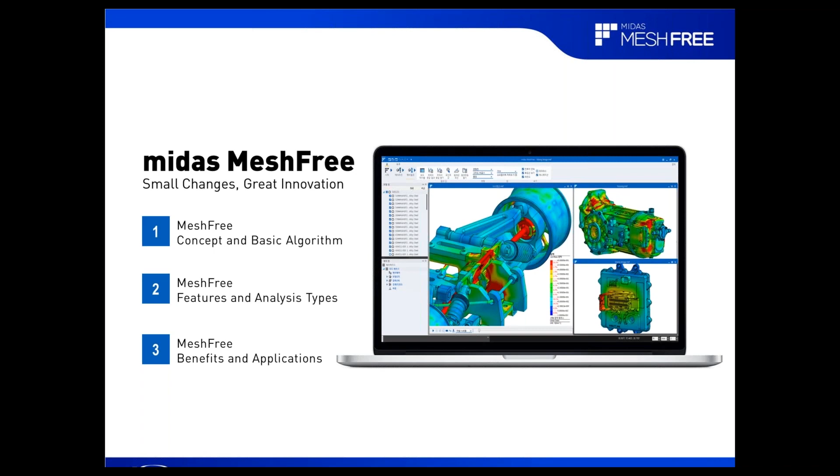But before starting the webinar, let me introduce MIDAS IT, the company behind MIDAS MeshFree. MIDAS IT is a simulation software development and distribution company. With our software, you can simulate the world around you. Our CAE simulation software allows you to simulate the behavior of objects, while our human simulation software can be used in human research and medical services.

MIDAS IT is presented with those three titles in Korea. First of all, since we started as a CAE software development and distribution company in the civil engineering field, we have ranked as the #1 market share holder worldwide. Also, MIDAS IT is known for our special management philosophy, naturalistic humanism. In 2016, we were selected as the best company to work for in one of the major newspapers in Korea.

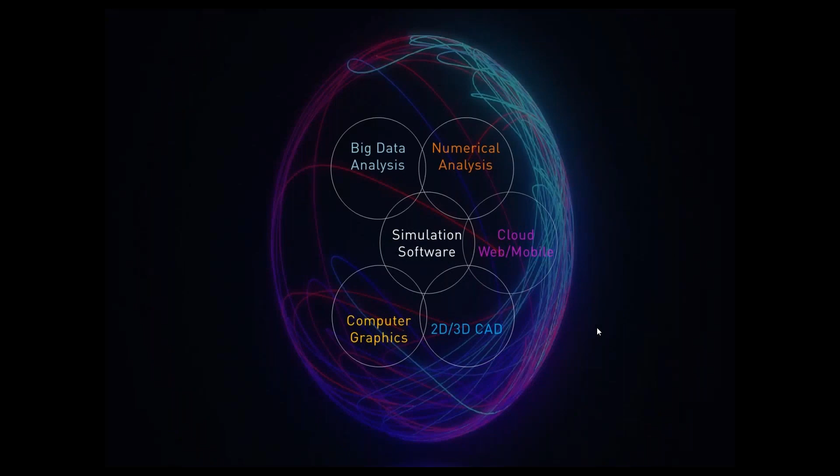MIDAS software simulation technology is aimed to mathematically model the phenomena in nature, solve differential equations through the numerical analysis, display optimal design results with the computer graphics. Recently, we also introduced AI, big data, and web mobile technology into our services.

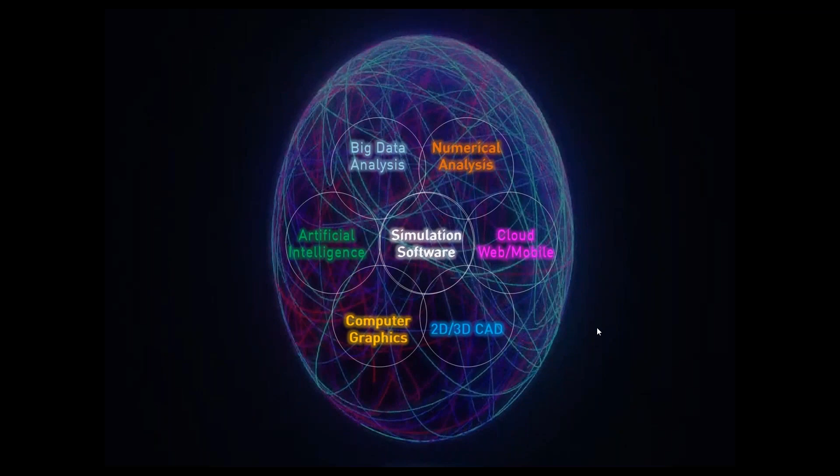In MIDAS, we believe in promoting the world happiness through our simulation technology and software. With our technology, we simulate buildings, bridges, tunnels, and manufacturing machines and objects in both civil and mechanical industries. We also simulate human behavior through our medical, healthcare system and our HR management system.

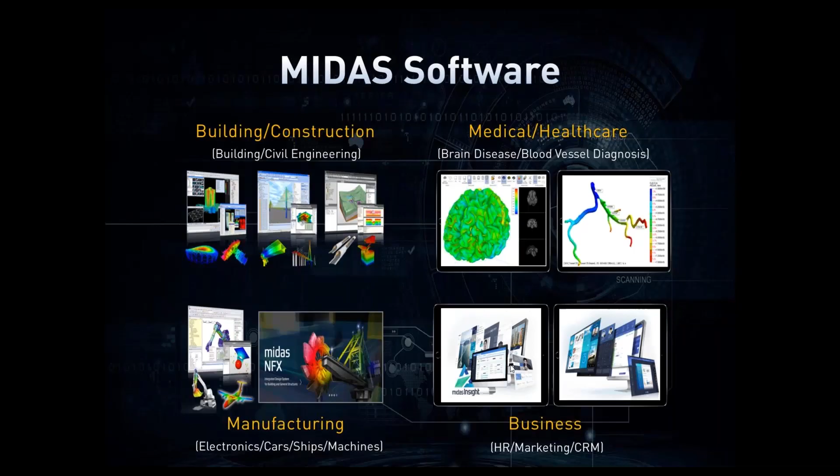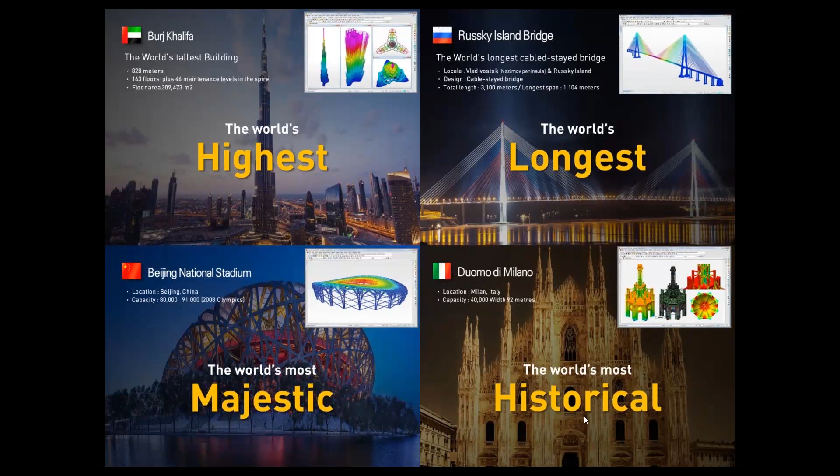You may think engineering and medical or human resource management services to be very different. However, human beings are a part of nature, so it must be possible to study humanity with our simulation technology. As you can see in this slide, the world's highest, longest, majestic historical projects all were analyzed and designed with MIDAS software.

In the civil engineering CAE market, MIDAS products hold the highest market share in Asia region. We distribute our software through 9 branch offices and 35 partner offices in more than 110 countries.

Now I will introduce our brand new CAE solution, MIDAS MeshFree. It is a cutting-edge design and analysis technology developed in collaboration with Samsung Electronics. Every single part of the software was planned and developed completely by MIDAS from the beginning stages, with the ultimate goal of completely eliminating the limitation and inefficiencies of traditional CAE.

If you have MIDAS MeshFree, you can simulate and analyze your original model directly without the need for any modifications. MeshFree provides the opportunity of validating your design through quick, easy, and accurate analysis at the reach of everyone, regardless of expertise. Let's now watch a brief introduction to MIDAS MeshFree.

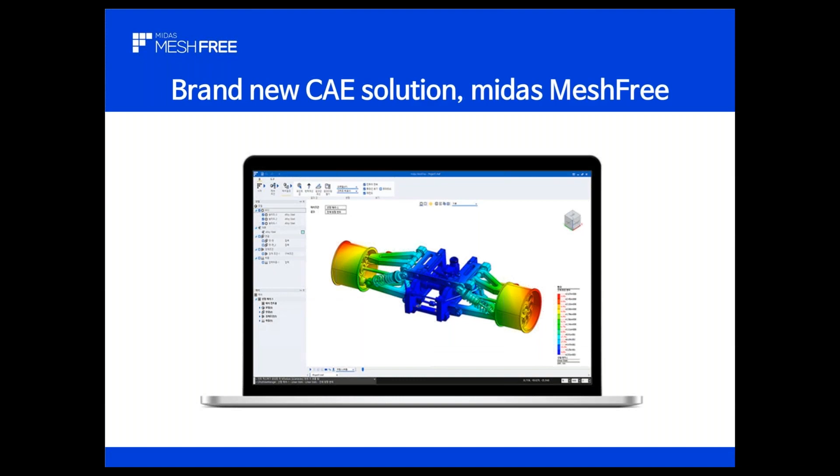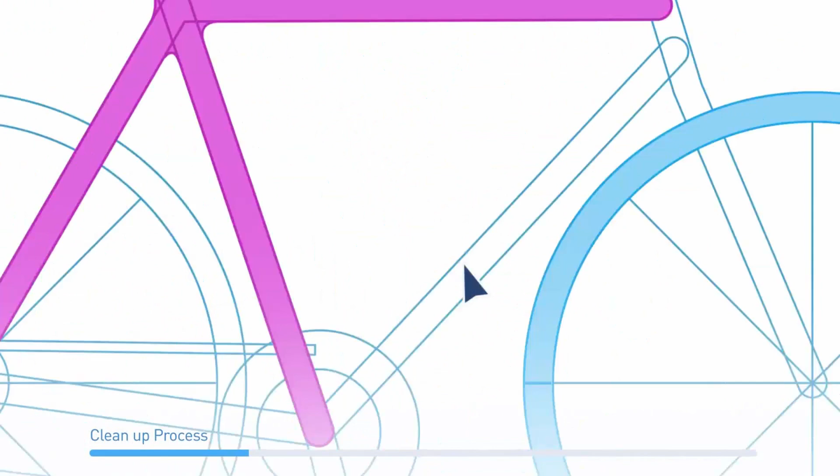Every analysis starts with mesh. Traditional CAE using mesh requires a time-consuming process for simplification and cleanup of complex geometry. Also, if the design is modified, you will have to go through the whole process again. Is there a more innovative way beyond the limitation of mesh?

Here, we would like to introduce a brand new CAE design tool, MIDAS MeshFree. It is developed by CAE development specialist MIDAS IT. MeshFree generates grid mesh, which does not require any simplification and cleanup process.

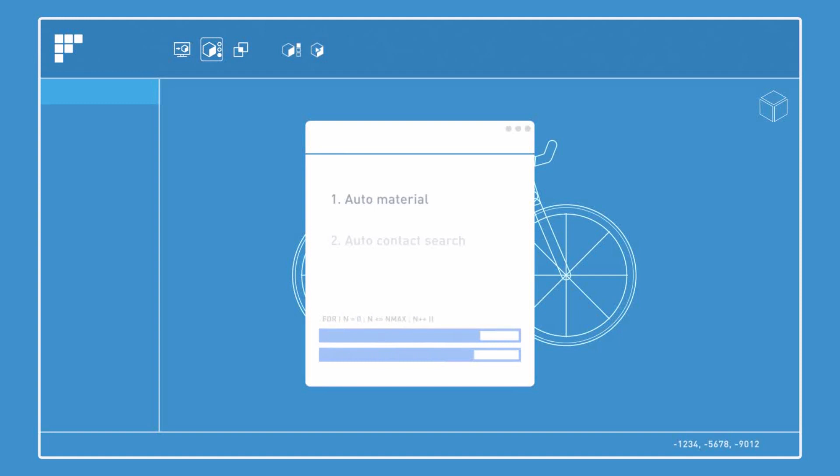MeshFree minimizes the analysis process into 3 simple steps. First, import the 3D CAD file directly. MeshFree is compatible with all commercial CAD files. It automatically defines the material properties and contact conditions during import.

Second, specify constraints and load conditions. Enter the constraint on the part to be fixed, and enter the load condition in the area where the load should be applied.

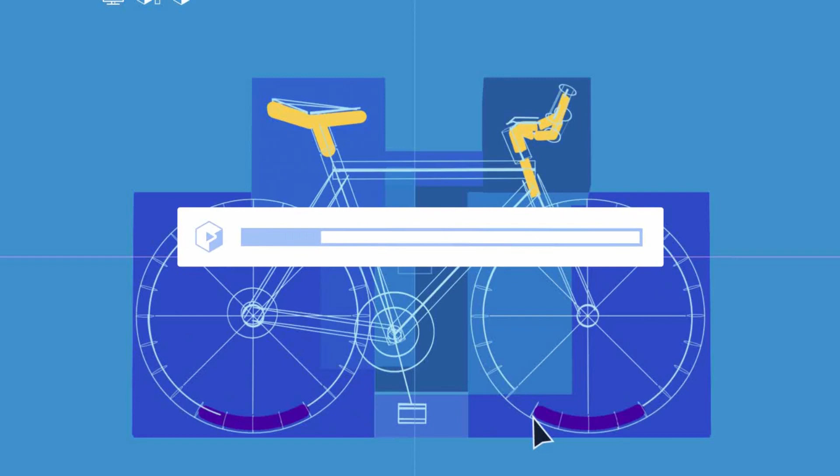Third, perform the analysis. Once the calculation is executed, the grid is automatically applied to each part to perform the analysis. Analysis can be performed immediately when the design is modified.

Many mechanical engineers have used FEM-based CAE software. What is the main reason for using FEM-based software? The main reason is its capability to analyze shapes of complicated geometry through various methods of mesh generation. But let's talk about what inconveniences you have with FEM software.

I'm sure the main inconvenience that comes to mind for many of you is the large amount of time and manual effort that complex geometries and equations bring to this process. The existing FEM process doesn't support performing analysis directly from the imported CAD file.

Simplification and cleanup of the CAD file must be performed before analysis in this process. Also, those steps cannot be auto-processed perfectly in the existing software, so many of these things have to be handled manually. Once you are done translating the model into the CAE software, do you think you can finally analyze it?

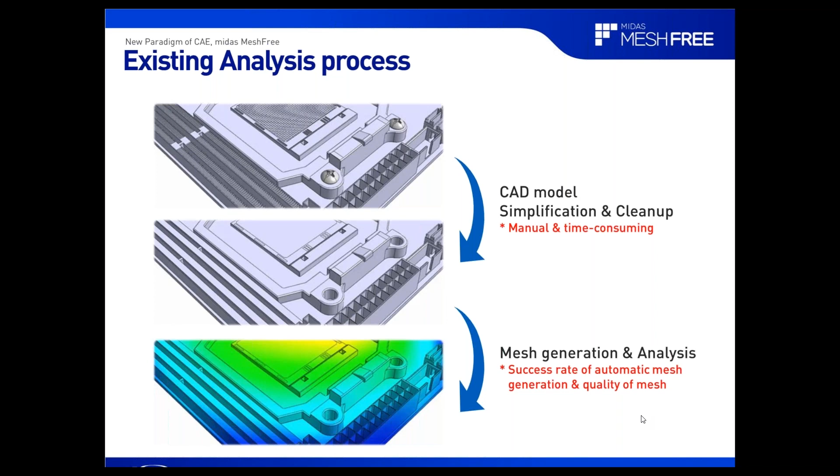Unfortunately, no. Mesh generation is left. Only after meshing can you finally perform the analysis. Plus, analysis results can be totally different depending on the quality of the mesh, so mesh must be generated very carefully. Although there are some programs in the market that support automatic mesh generation, they are not yet able to provide a good success rate. To sum it all up, the main limitation of existing CAE software is meshing.

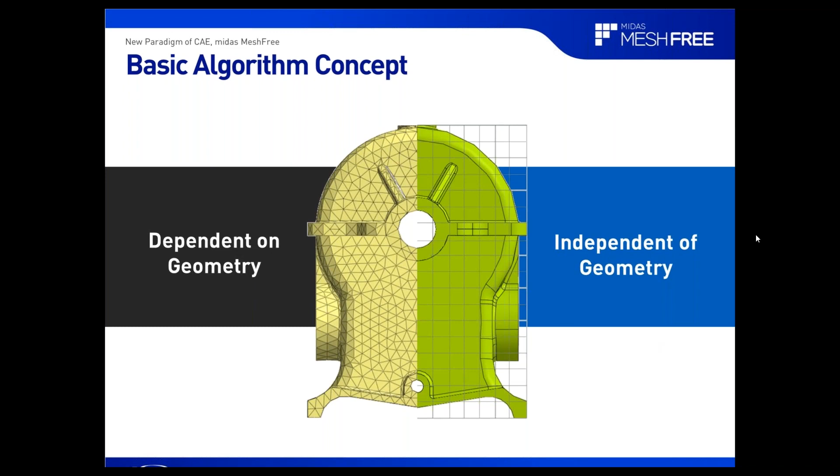However, MIDAS MeshFree is different from them. It's possible to perform the analysis fast because MIDAS MeshFree automatically generates a structural grid regardless of the complexity of the geometry.

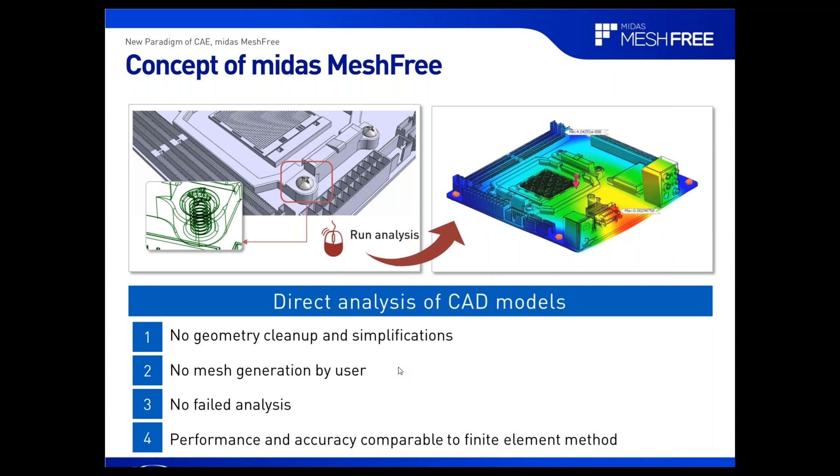As you can see, despite the complexity of the shape, which includes the screws and the bolt head, if you have only a 3-dimensional CAD model, you can run the analysis immediately by one-clicking without any additional cleanup or mesh generation procedures. That is, MIDAS MeshFree provides a new process that overcomes the limitation of meshing.

Now I will introduce MIDAS MeshFree's analysis algorithm and compare it to other methods. There are three main methods: first, traditional FEM methods which most of us have used; second, general meshless methods; third, the newly developed MIDAS MeshFree method.

First, FEM. It's a universal analysis method that supports most analysis types. However, mesh generation is mandatory, and simplification and cleanup are required before that. In a few words, there are mesh quality problems and limitations to automating the process. Therefore, it's not very suitable for entry-level analysis engineers and design engineers.

Second, general meshless methods. It does not generate a mesh, but distributes nodes in the analysis area instead. It calculates deformation, including those nodes. So, analysis results are still dependent on node distribution. The result will be accurate in areas where nodes are well distributed, but there is high probability that the result is not accurate in areas with no nodes. Furthermore, results can differ depending on the coupling methods used.

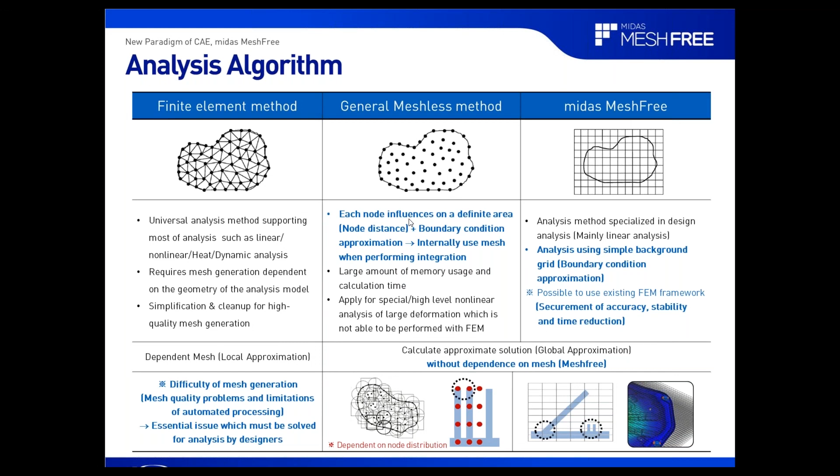Thirdly, the MIDAS MeshFree method uses an algorithm developed by combining the previous two methods. It performs analysis by generating not a conforming mesh, but a background grid mesh. To explain in more detail, it creates a background grid in the area where the analysis model is. If an area completely fills up a grid, it is calculated using the same formula as existing FEM.

But for areas which fill the grids partially, like this, MeshFree analyzes them by using the existing FEM and separately processing this area in the integration for the area volume.

The main feature of MeshFree's algorithm is a method for processing boundary conditions in all areas. In existing FEM, it's difficult to create a mesh because load boundary conditions can only be applied on nodes. However, MIDAS MeshFree uses both the existing FEM methods and also a special function for any area. This way, it's possible to exactly analyze any area regardless of whether there are nodes on its boundary or not.

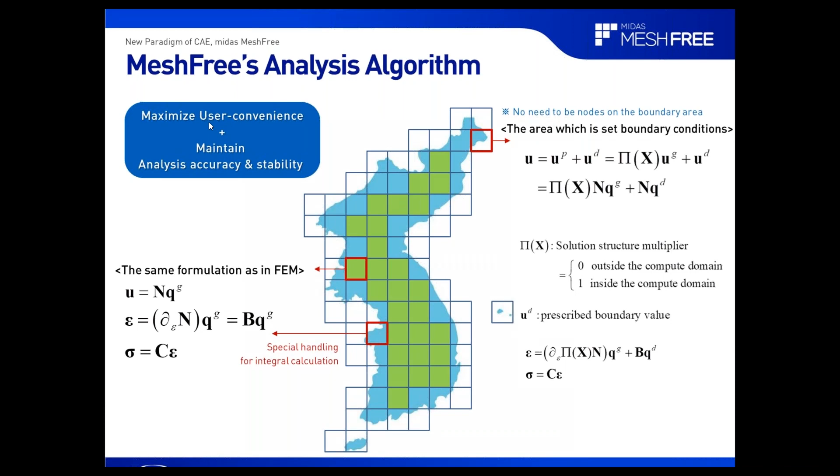Please imagine how much cost, time, and human resources will be saved when performing analysis on a large-scale model with MIDAS MeshFree.

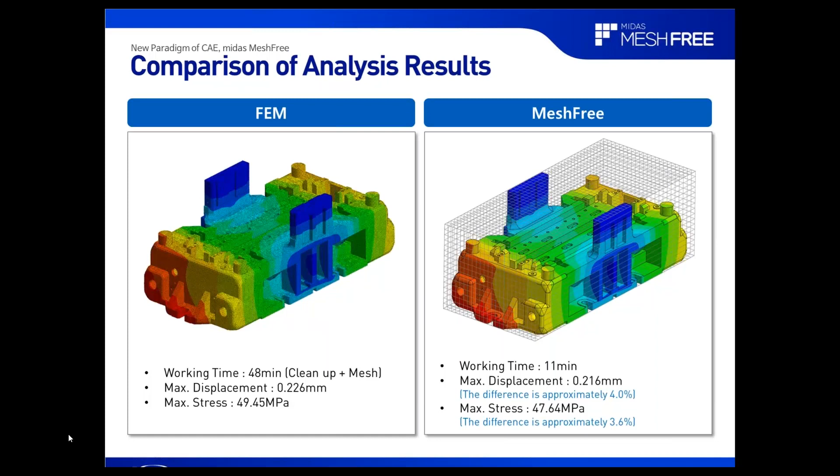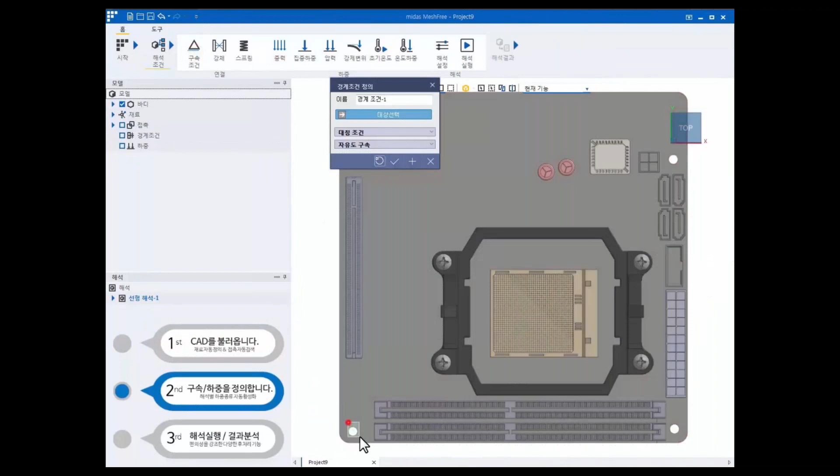Next, I will show how analysis is easily performed with only a three-step process. First, run MeshFree and then select linear static analysis. Second, import a 3D CAD file. When it is imported, the material properties defined in the CAD file are automatically input.

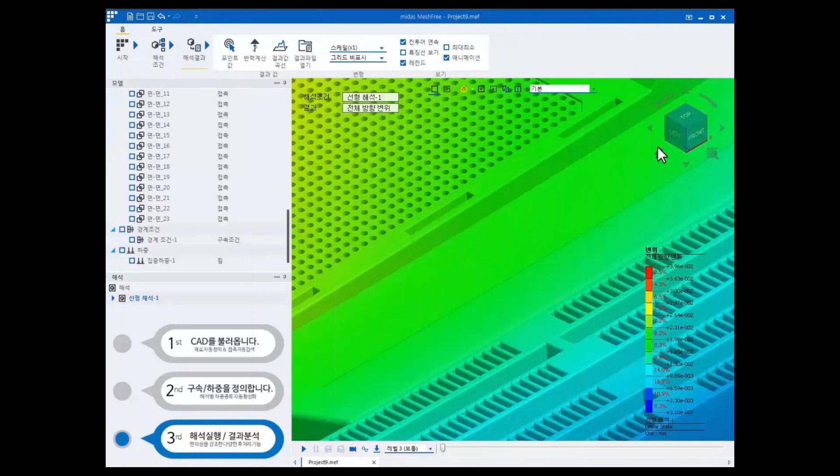So what you have to do is only define constraint conditions on the four corners, and then put load conditions as a concentrated load in the vertical direction. Then click Run Analysis. MIDAS MeshFree performs the analysis and then provides the result by itself.

As you are seeing, even though it has complicated geometry, MIDAS MeshFree completes analysis in only three steps, using the original file without any modification.

Let me show you the best workflow using MIDAS MeshFree. Import the CAD file, apply loads and boundary conditions directly on the CAD, run the analysis. Then the software automatically generates a mesh, performs the analysis, and provides the visual result with MeshFree solver.

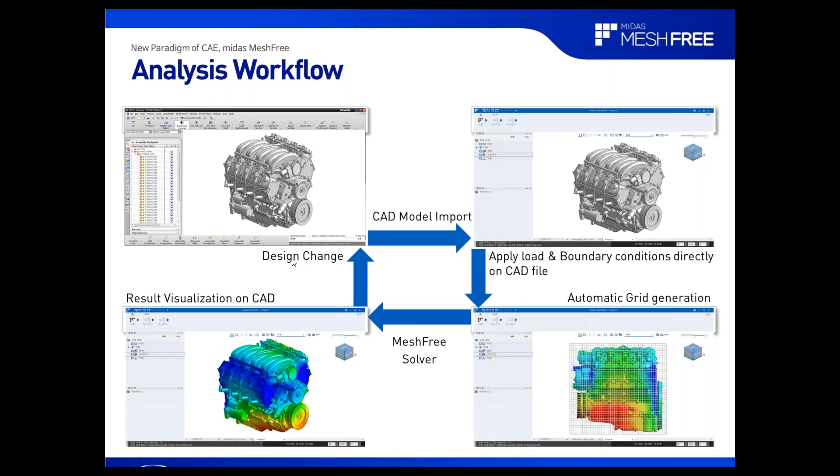And if you decide to change the design, the modification can be easily input into the workflow under the same load and boundary conditions, so you don't need to repeat the entire process. How is that? Easy?

In this chapter, I will introduce the program's main features and supported analysis types. The first feature of MIDAS MeshFree is...

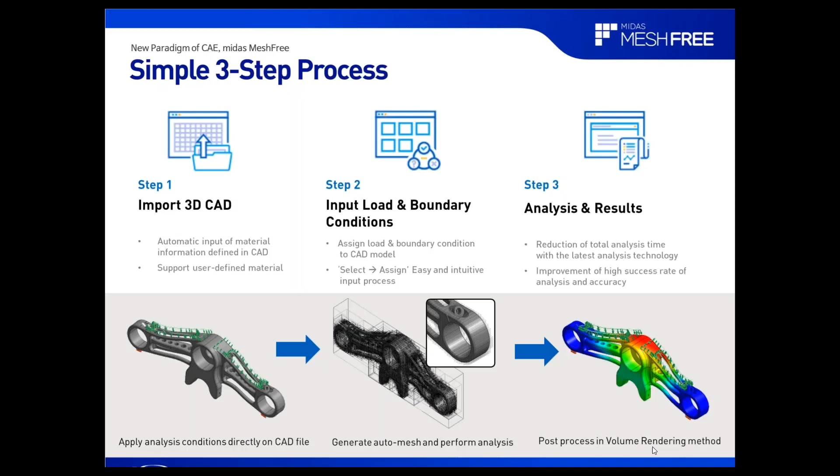A simple three-step process. In the first step, import CAD. No cleanup is necessary, and material properties defined in the CAD file are applied automatically to the MeshFree analysis model. After user input of load and boundary conditions, the software generates mesh automatically and performs the analysis by itself, then provides post-processing results using volume rendering.

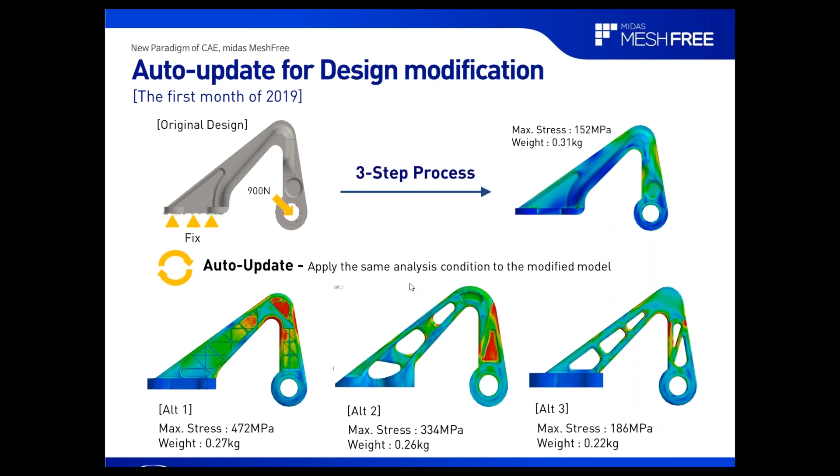The second feature of MIDAS MeshFree is powerful adaptability to design modifications. When you change the design, it automatically recognizes and updates the modifications into the model. It also automatically reflects the constraint and load conditions already set for the analysis. Thus, you don't need to manually revise the modification or reset the boundary conditions. That is, it is possible to analyze a model while also importing it.

The third feature of MIDAS MeshFree is intuitive UI. The interface shows you only the functions and guidelines required by each analysis type, so it is very easy and intuitive for even entry-level users to set the conditions.

When you start the program, you just select the desired analysis type from the analysis type template. For example, if you select linear static analysis, the program will only provide the available load and boundary conditions for linear static analysis. So you do not have to go back and forth figuring out what conditions are appropriate, as you would with other analysis software. Only the functions required for the analysis you selected are provided as options.

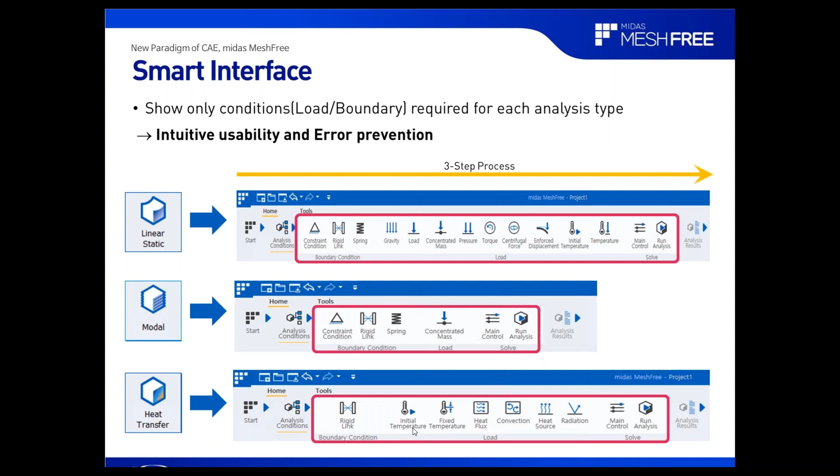In case of modal analysis, load conditions are not necessary, so only boundary conditions are provided. In case of heat transfer, we only provide conditions required for thermal analysis, such as conduction, convection, radiation, but not load and constraint conditions. CAE software in the mechanical engineering field is not used every day, but rather once or twice a month. On the other hand, MIDAS MeshFree's UI was developed so that users are enticed to use its intuitive features every day.

The first main feature is a function for checking post-process analysis results. Naturally, many engineers have doubts about the obtained results after analysis, like, did I perform the analysis in a proper way, or can I believe the result is accurate? For that, MIDAS MeshFree provides tables of strain error density through the use of strain energy error analysis.

Basically, analysis results will be reliable enough if the total error percentage is under 10 to 15%. If the total error rate is too high, you can find in which part this error occurred by checking the percentage of error per part.

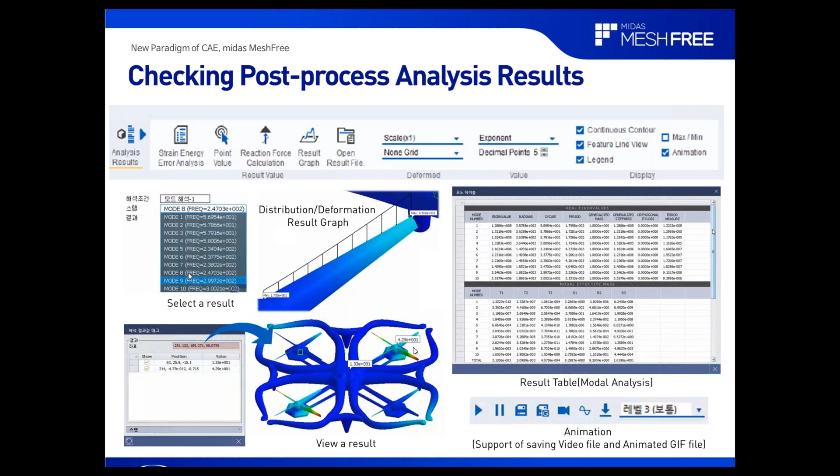Also, in the post-process stage, you can see graphic representations of the result on the background grid used for the analysis. In addition, you can control grid size manually if grid size revision is required because the error rate is too high. So far, I have introduced the main features of MIDAS MeshFree. From now on, I will show you what models and analysis types are supported by it, and different applications where they can be used.

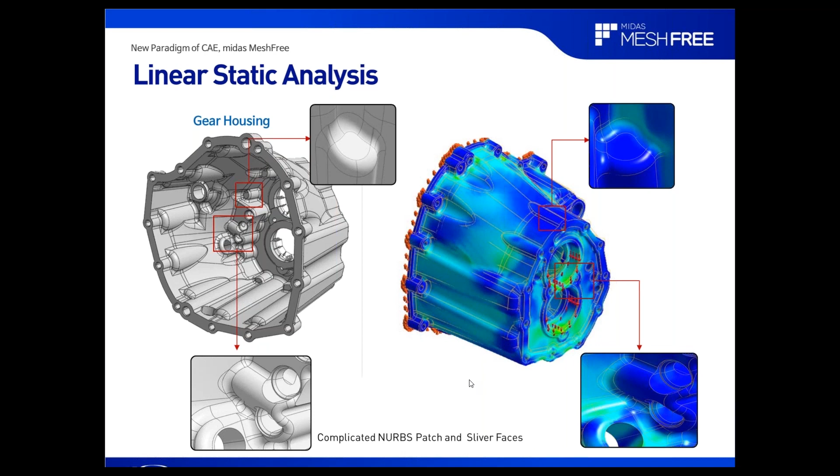First, linear static analysis. The gear housing, a problem very familiar to analysis engineers and even design engineers, is presented here. It's a case having many thin and long sliver faces due to its complicated NURBS patches and fillets. If you are using traditional CAE software, you would have to reorganize NURBS and sliver faces first in order to generate mesh on this model. However, in MIDAS MeshFree, you can obtain analysis results by only importing the CAD file directly and then running the analysis.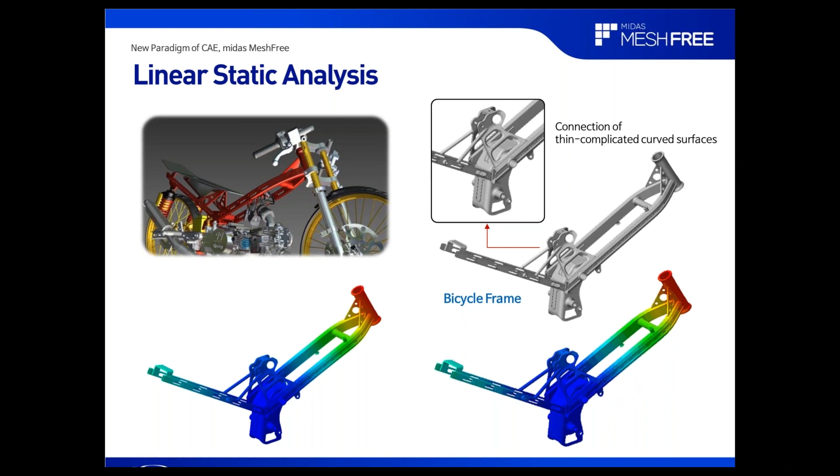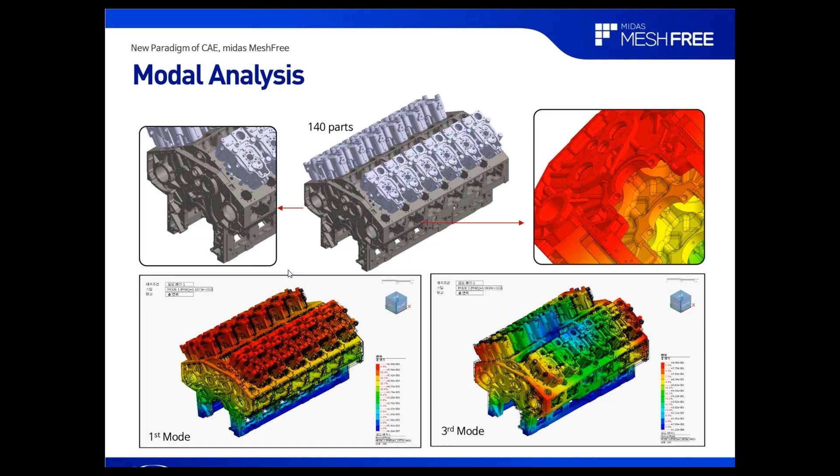Compared to existing FEM programs, this is a great example of how the analysis procedure and time can be notably improved by using MIDAS MeshFree.

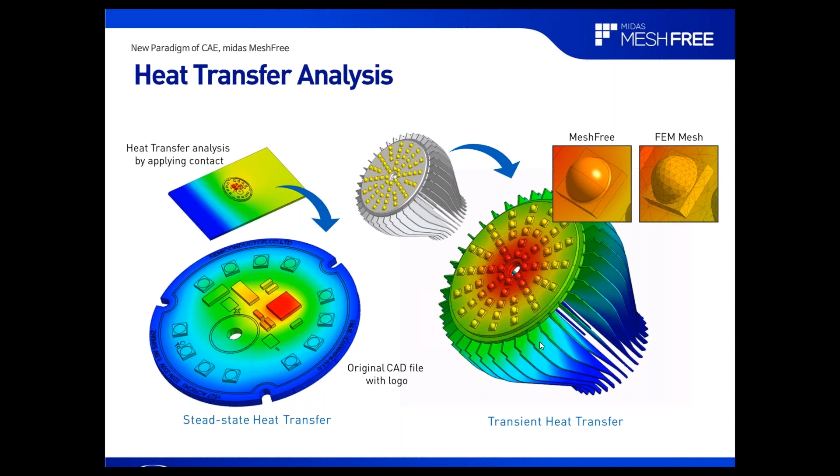So we support not only heat transfer analysis, but also thermal deformation and stress analysis, providing the most accurate results, and fatigue analysis.

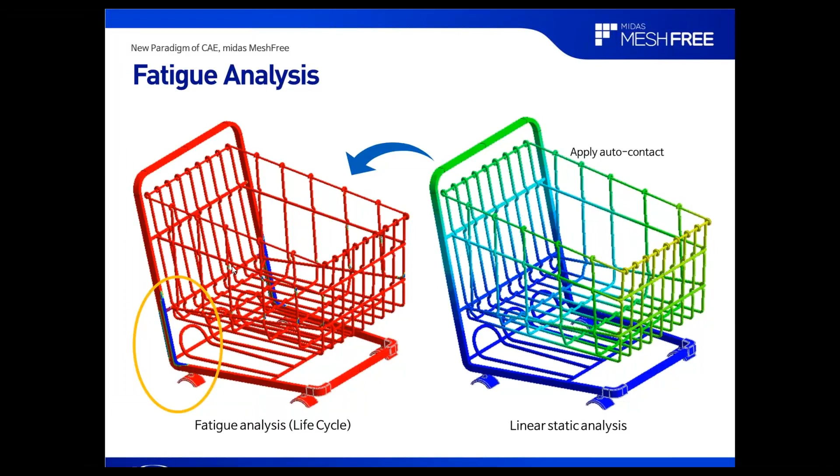As a result, we can see that the life cycle is lowest in the encircled part when the cart rocks back and forth continuously.

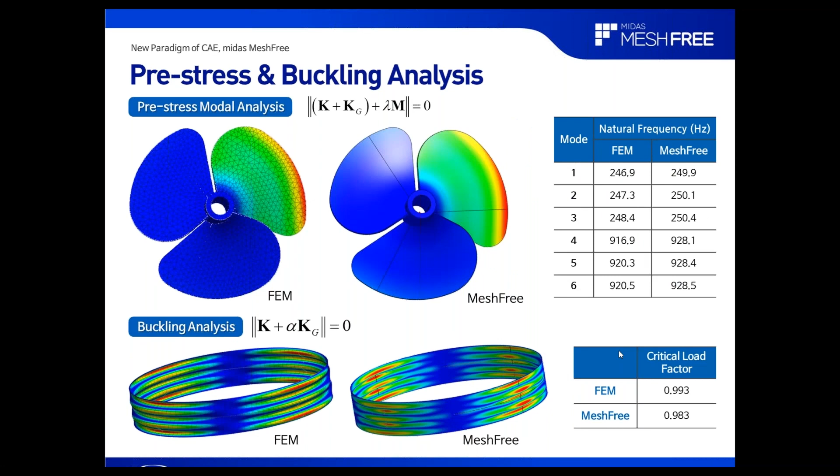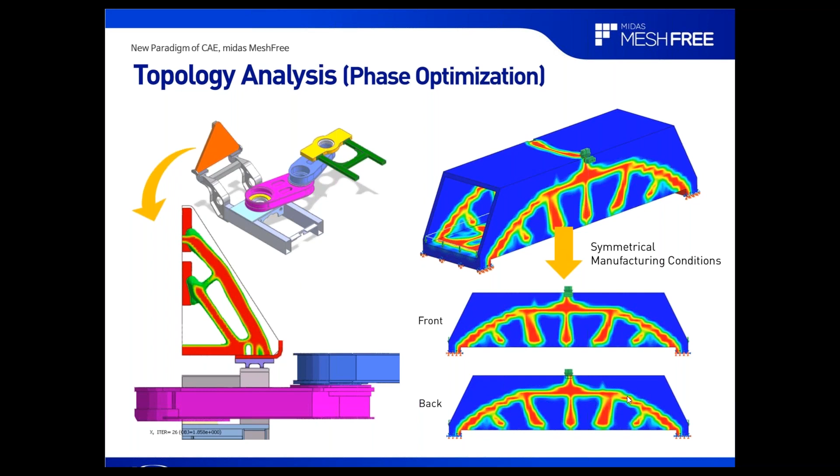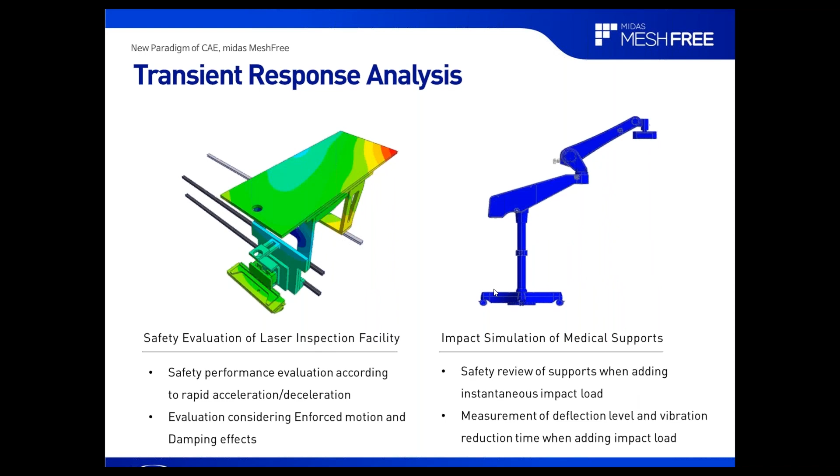In addition, linear dynamic analyses were developed and verified as well, so they are supported in MIDAS MeshFree, such as transient response analysis. You can see the two cases of the analysis type, and frequency response analysis,

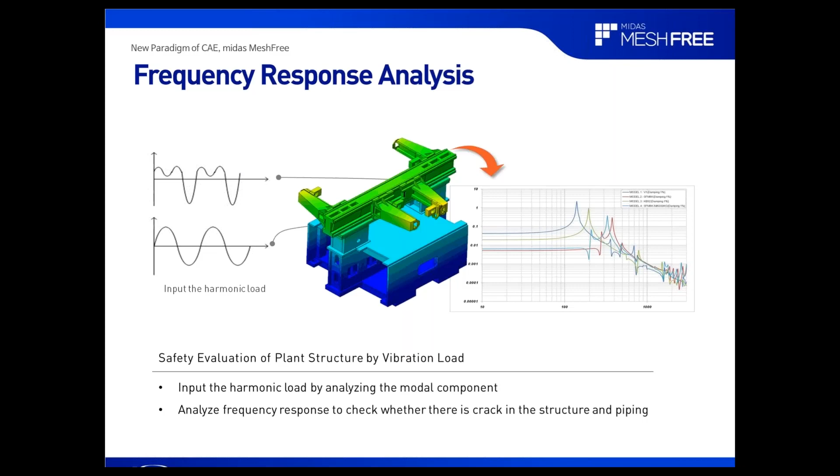random vibration analysis, and even response spectrum analysis.

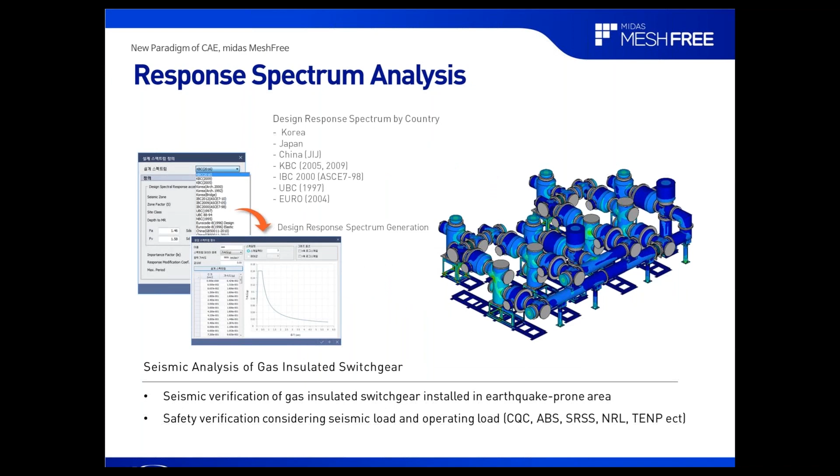So overall, I introduced the main analysis types supported in MIDAS MeshFree. And in this slide, I'd like to show you which analyses are supported in each version.

First, in the standard version, static, linear static, modal, fatigue, heat transfer, thermal stress, and topology analysis are supported.

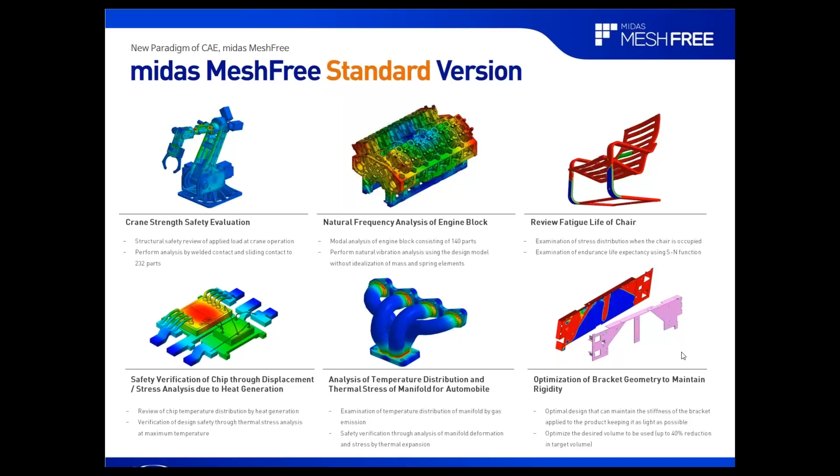In the advanced version, transient response, frequency response, random vibration, and response spectrum analysis are supported as linear dynamic analyses. And also general contact and material nonlinear analysis for elastoplastic material models are supported for now for non-linear analysis.

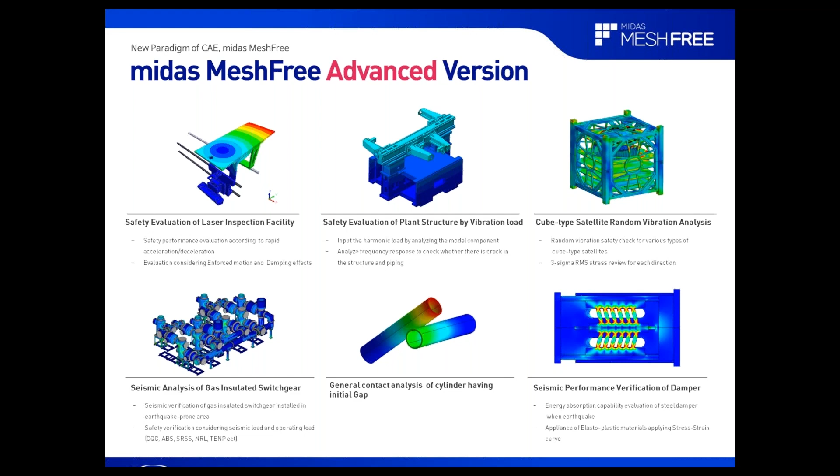Now, what are you most concerned about when you use new software or introduce it to your work? I think it's probably this: can I trust this software, or is the software verified? So I prepared detailed verifications in order to set you free from all your concerns about MIDAS MeshFree.

First, a convergence characteristic test. This is intended to show that results are converging more and more when reducing mesh grid size, and that this happens with FEM results as well.

And as the slide shows, you can see the results from MIDAS MeshFree and traditional FEM are pretty much the same. Basically, MIDAS MeshFree performs analysis based on FEM methods. Therefore, the more compact the grid size you use, the more reliable your result will be.

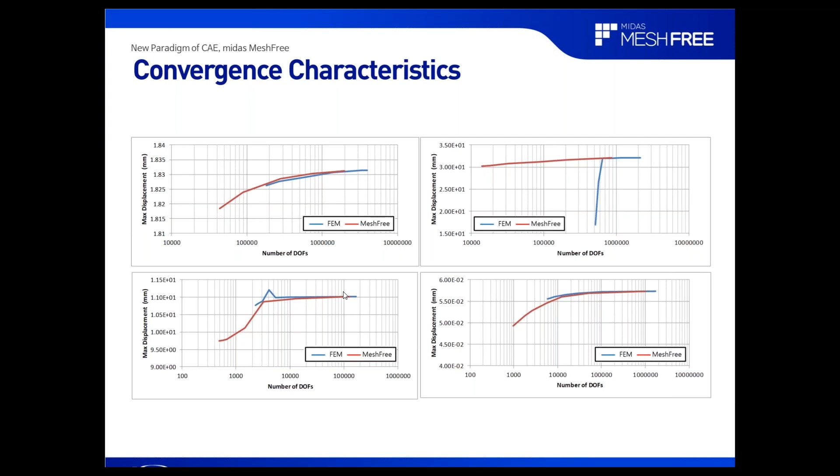The second verification is conducted using benchmark problem models provided by NAFEMS. We performed unit model verification regarding twisted curved models, nonlinear materials, general deformation, stress, structural analysis, and even thermal analysis.

As a result, we checked that MIDAS MeshFree provides highly accurate results when compared to the reference values and FEM results, as shown in the table.

I brought only two cases from the verifications, but if you want to see the rest of them, you can check them on our official MIDAS MeshFree website.

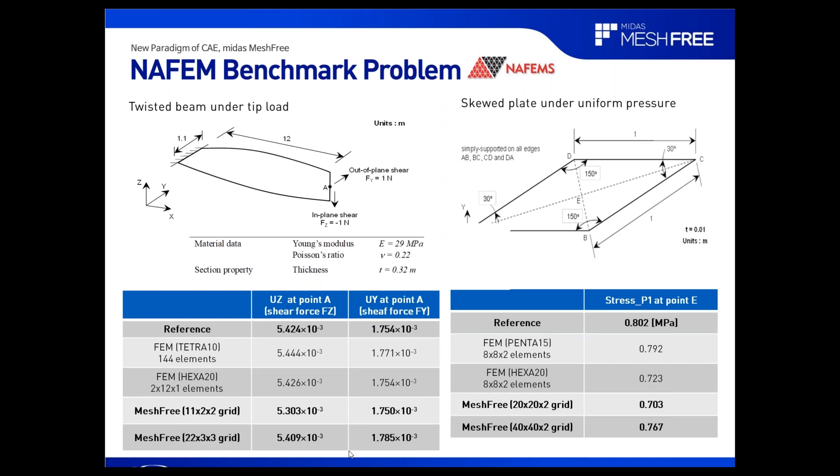The third verification is about a simple part assembly in a real field. We compare the results to existing FEM results regarding a thin surface model.

First, we performed modal analysis in order to check that stiffness and mass are accurately calculated. Next, we performed structural analysis in order to verify that not only displacement but also stress are calculated accurately. As you can see, the results are very similar, and the difference is so slight that it can be ignored.

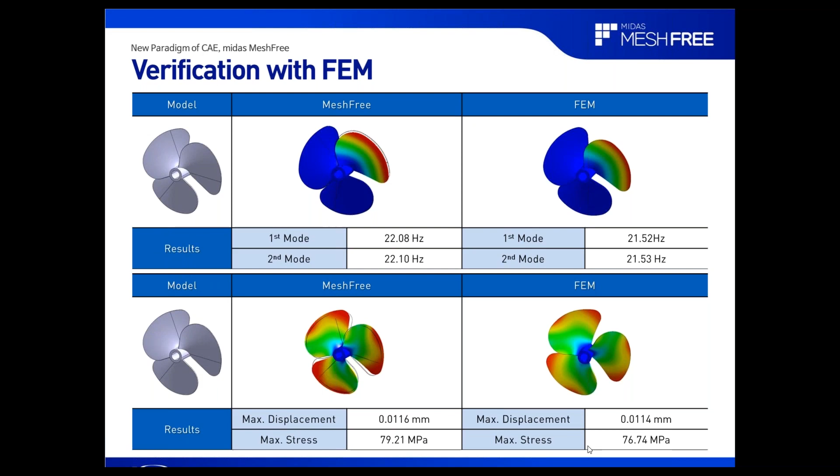Regarding thermal analysis, we found that it provides almost the same level of accuracy as FEM, by comparing the temperature results derived from a few practical models.

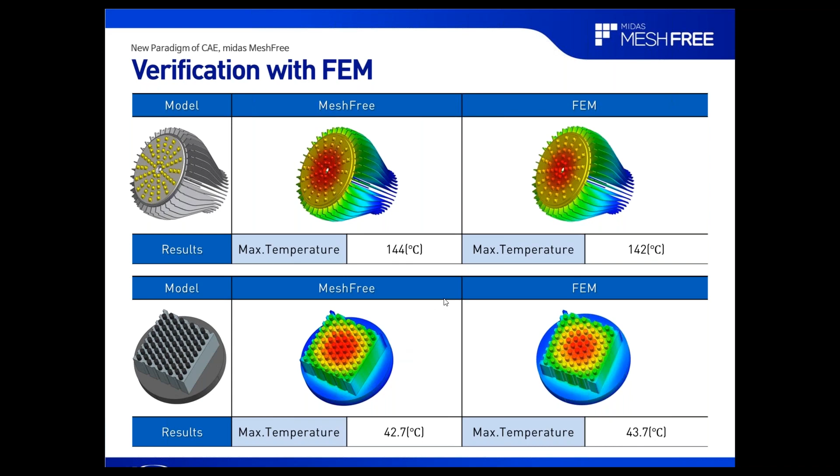Furthermore, not only we but also Samsung Electronics performed practical verification for three years before MIDAS MeshFree was officially launched in Korea. There are some models from the verifications. We checked the similarity of results between FEM and MeshFree for multi-curved practical models.

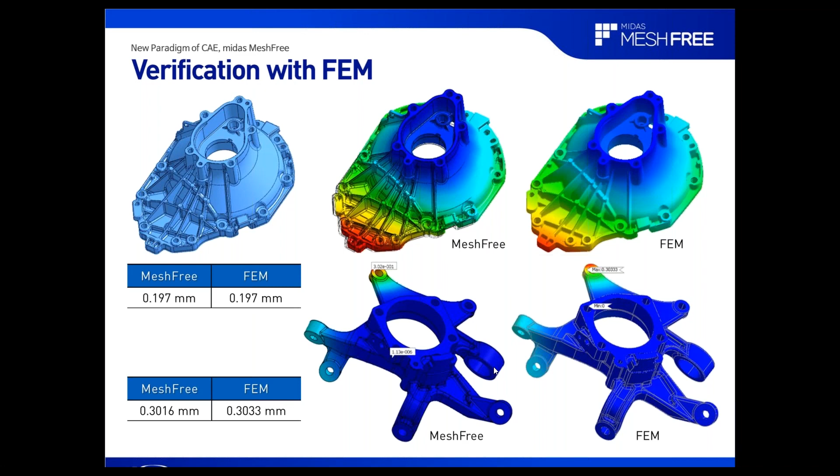Check this slide. The same holds for long and curved thin models as well.

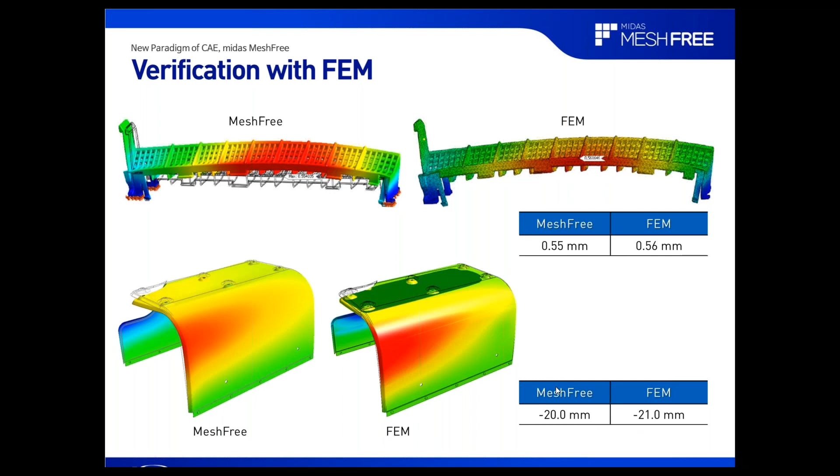From now, I would like to show you practical verification samples sent by some of our clients. These are verification materials that clients analyzed. They compared the result obtained

with those using the existing FEM software, MIDAS NFX. You can see that the results are almost the same, and the error rate is only 2 to 3%.

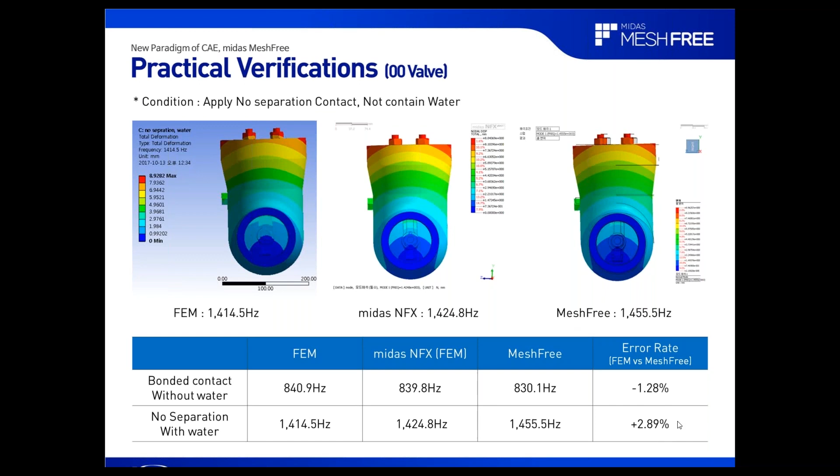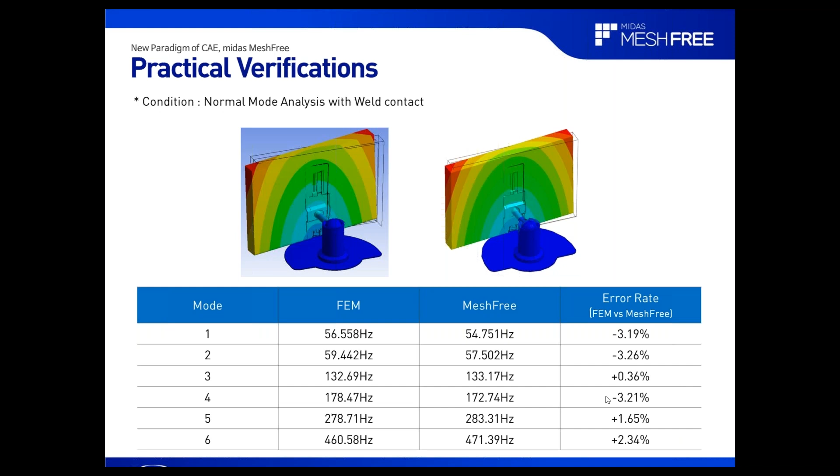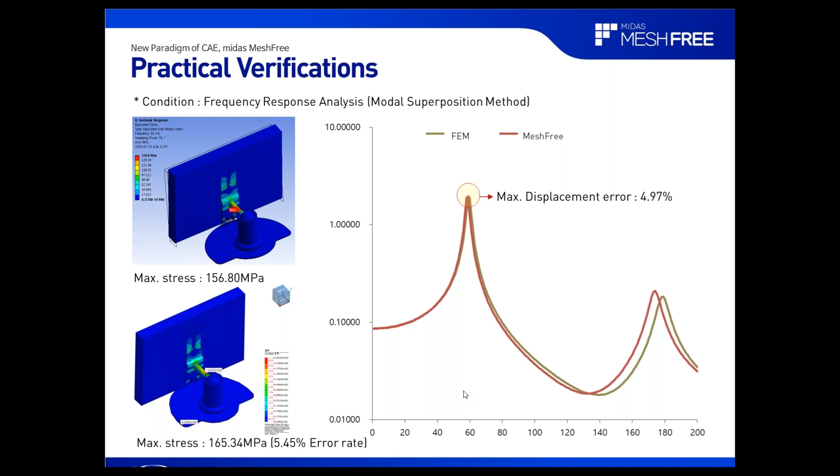Above these modal analysis cases, frequency response analysis cases, and even random vibration analysis, we can say that MeshFree provides very reliable results with an error rate under 5%.

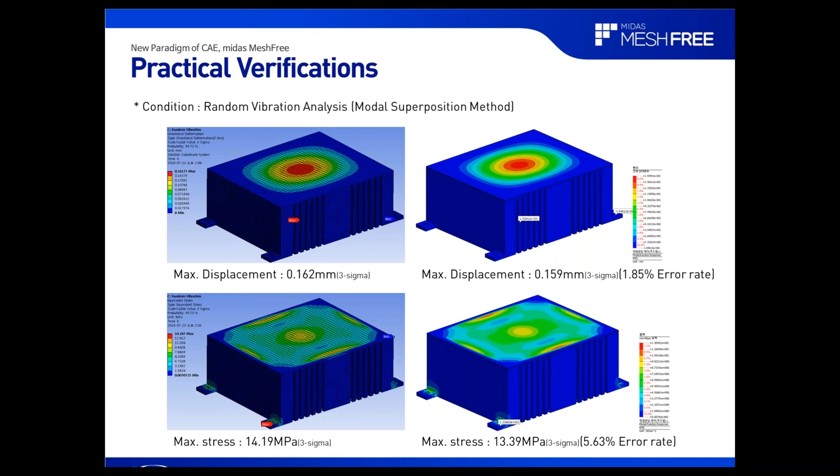In conclusion: 1. NAFEMS benchmark program tests. 2. Practical verifications by industrial partners. 3. For now, MIDAS MeshFree is currently distributed to at least 150 companies, so clients constantly send verifications and feedback. This way, we at MIDAS IT continuously verify and improve our software, MIDAS MeshFree.

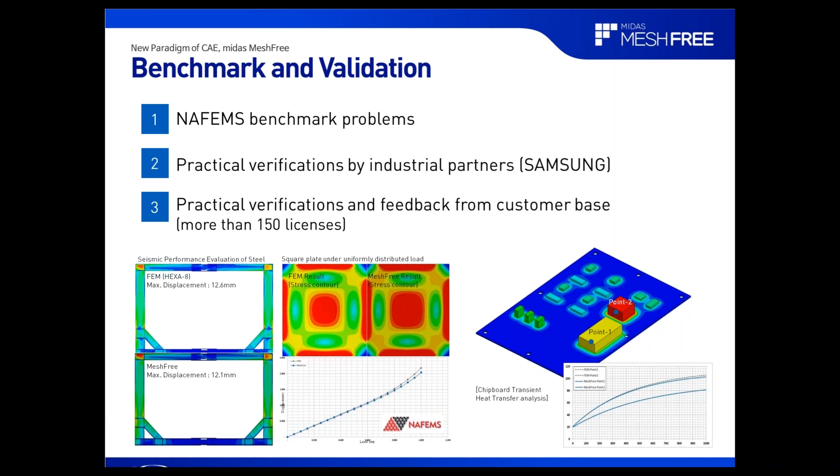Finally, we arrived at the last topic: how can you apply MIDAS MeshFree to your work?

Actually, if cleanup and mesh generation are eliminated, the processing time can be reduced by 60%, and the analysis is successful 100% of the time. Then what can you do with the saved time? You can check the origin of the error and why it occurred, modify the model, and run analysis multiple times to obtain better results.

Also, you have to learn the software for at least 3 months if you want to use traditional FEM-based software. However, 1 to 2 weeks is more than enough time to learn how to use MIDAS MeshFree. That means it's possible to apply it to your practical work faster because the learning time is shorter.

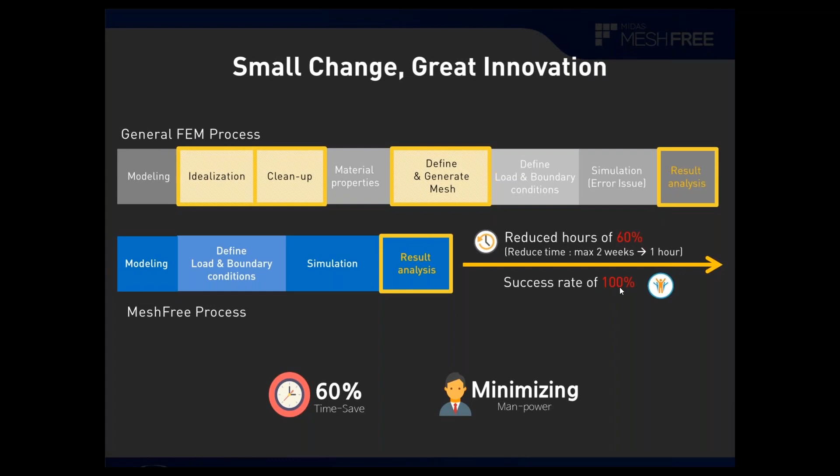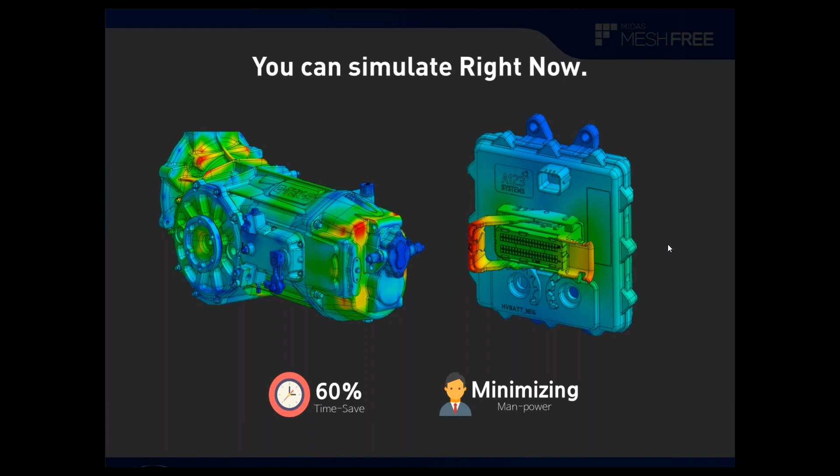What worries practical engineers the most is: 1. How to reduce cleanup and mesh generation process time. 2. How to analyze models which aren't supported by existing analysis methods. As I mentioned, you can perform analysis many times and at the same time reduce the time spent analyzing due to the processes eliminated when using MIDAS MeshFree.

Can you see the model images? Normally it takes a month to analyze this kind of model. However, you can obtain accurate results to determine the final design in a week if you use MIDAS MeshFree. In other words, it's possible to verify models with MIDAS MeshFree at least 3-4 times in the same time it takes traditional FEM to verify it once.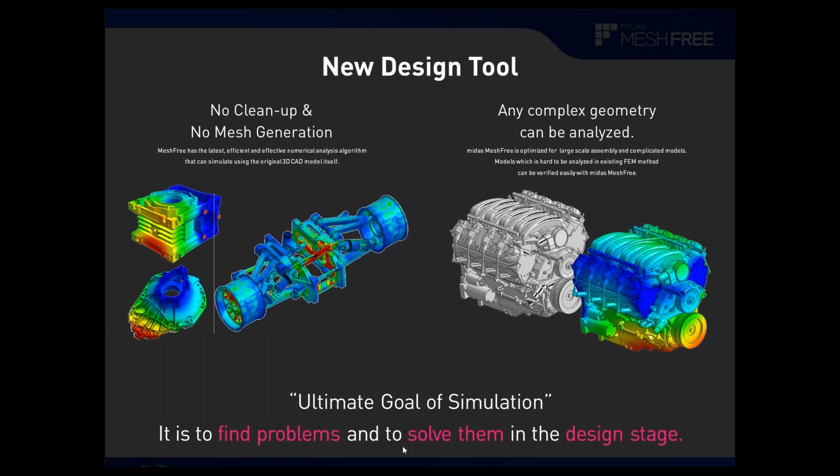Therefore, you can find problems in advance through iterative analysis and simulation, easily modify the design, and obtain the optimal design faster and more efficiently if you use MIDAS MeshFree. There are over 150 companies introducing MIDAS MeshFree and getting the benefits for their business.

So far, I've introduced all of MIDAS MeshFree. I'd like to summarize it all in 6 points, and then we will end this webinar. We provide MIDAS MeshFree so that you can get innovative experiences in your work process, even though you may not have professional experience in analysis.

You can learn and use the software easily with its 3-step process and intuitive UI. You can easily improve the design and find its optimal design by automatically updating modifications. And with all those features, you can save time and cost when performing simulation.

Also, we provide technical support for 24 hours, 365 days. So if you want general information about MIDAS MeshFree, you can visit our official website. And if you have technical queries, you can use the Global Technical Support website. For quick and simple questions, you can ask us via Skype or chat.